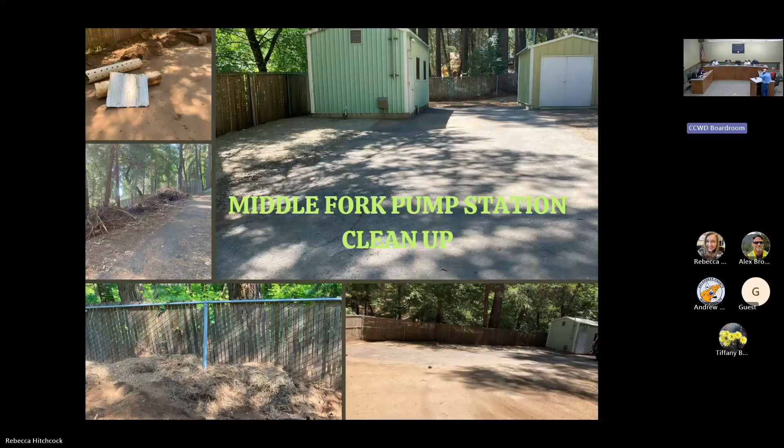So the construction crew, the operator up in West Point, to clean that up. It's bad. They're doing a great job. It's kind of hard to see, but the grade of that driveway to the pump station cleanup is really steep. And so they're doing a great job.

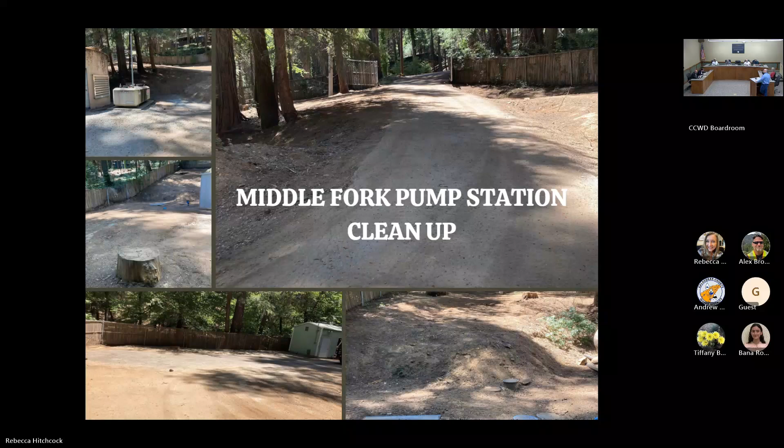So this was a job that was completed. The construction crew worked with the utility crew. It's great. There's 10 folks working on this, and knocked it out in a day. So we talked about in the engineering committee yesterday, fire hydrant O&M. Got some fire chiefs here. Great conversation. So carrying that theme forward.

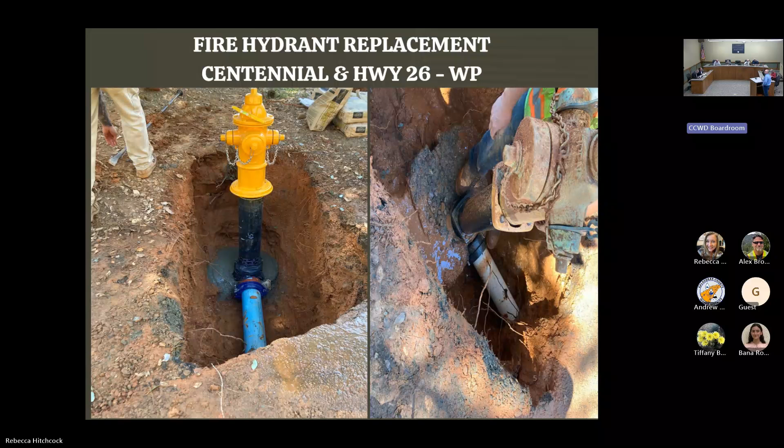We're always out replacing aged fire hydrants. So you kind of see the image on the right. That's the aged failed hydrant that we pulled out of the trench, with the white PVC at the bottom. The image on the left, you can see the hydrant with the magnetized level on it and a kicker for it. And Matt Duncan on our construction crew, working with his team. And we're pretty happy, these are great jobs.

Did he have to keep his foot there till the concrete set? Yes, exactly right. With the level.

Chairman, yes, a quick question. When you did the 300-plus feet of pavement on Wong Court, I know we've discussed this over the years, but are we still coordinating with the county on their paving program in the Rancho? Yeah. The county's involved really from the beginning of the project through soil compaction, paving. County is giving the thumbs up on it. Okay, so we're not working at cross purposes.

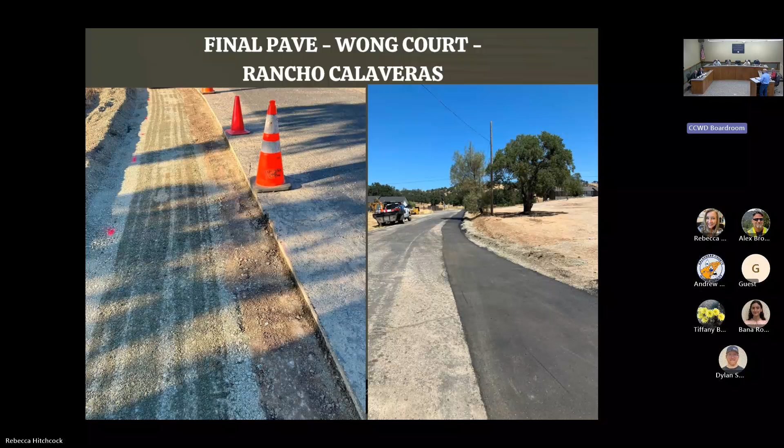Absolutely right. And to carry that a little bit farther forward, annually they give us their work efforts for the year and all the CSAs, and then we work around that. And we'll actually ask them, hey, can you hold up on this area? We have a bunch of work to do. So that when they finally come through, our service lines that need to be replaced are done. Thank you. Yeah, absolutely.

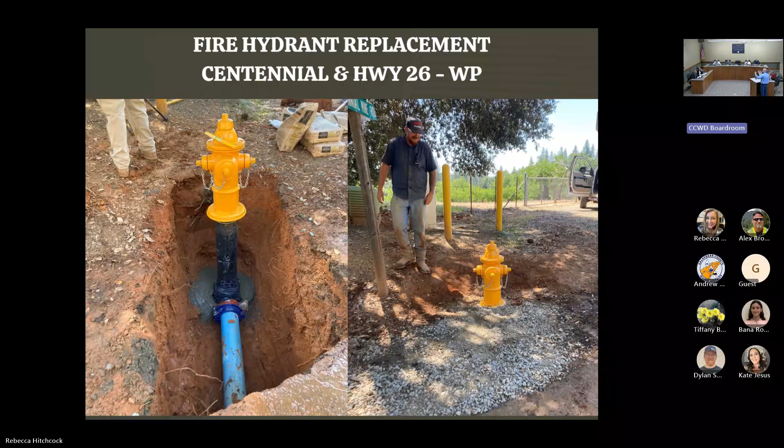I have a question on that hydrant installation. We saw several examples at yesterday's engineering meeting of the isolation valves, but I don't see one here. Was there already one close by? There's already one there. It's just not in the picture. Sometimes what we call the hydrant runner, which is the section of main from the isolation valve to the hydrant, can be 40 feet long. But yeah, this one's not very close.

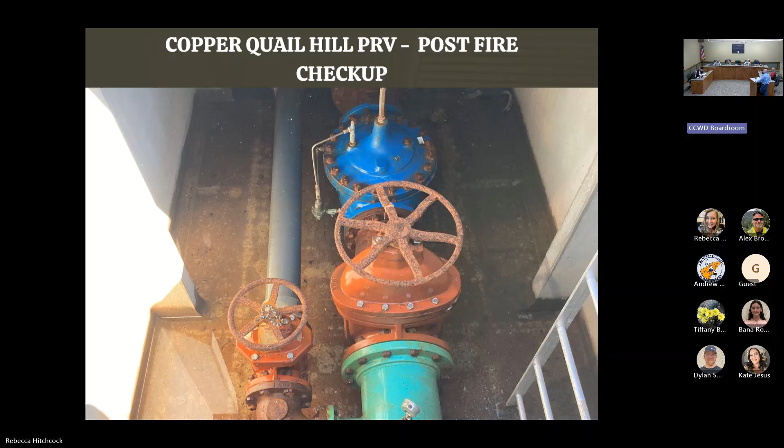And so this is the infrastructure inside of that. It's very large. I believe that's an 8-inch here, 4-inch coming off the side. Beautiful. And then you can see the ladder on the right for access. So this is one of our larger PRV stations, but luckily the grass fire didn't damage the station.

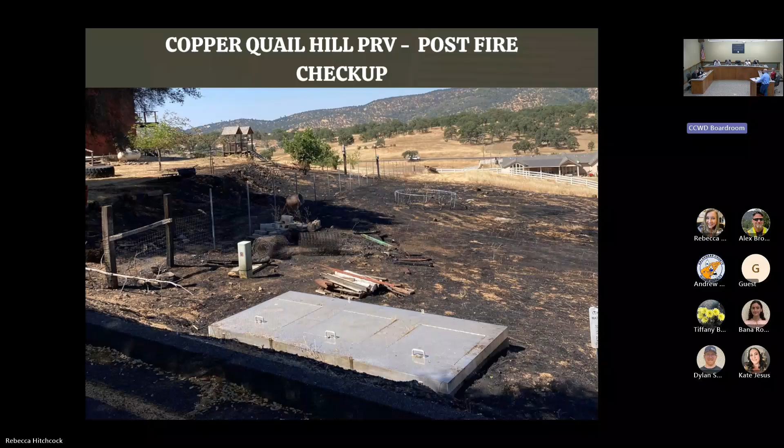What happened is our treatment operators were experimenting with coagulant doses on reclaimed water, trying to optimize the amount of throughput through the filter. That water that they have to push through that filter to the Saddle Creek, Copper Valley Golf Course is initially full of algae. It's really turbid. So one would think that the more coagulant you add, the greater the throughput of the filter, the cleaner they can get the water.

The operators through their tests actually realized that they were overdosing coagulant, so they reduced the amount of coagulant. And you can see the flow rate, the image on the top, increase. So they're able to increase the throughput of the filter by reducing the amount of coagulant, which in effect increases our ability to lower our storage pond, give more water to the golf course, and actually save money.

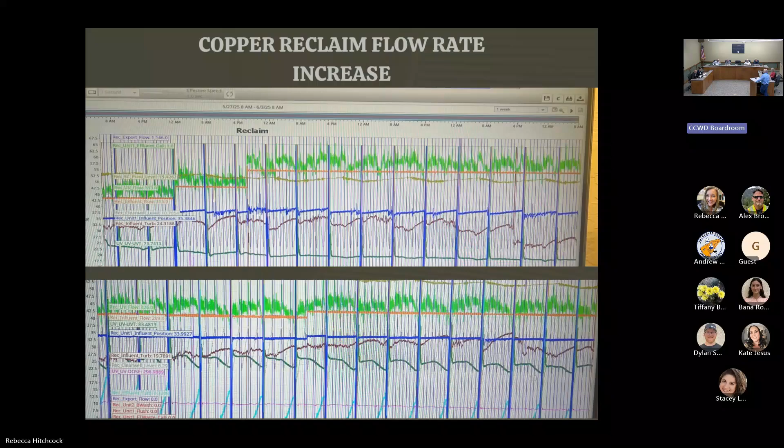So our treatment operator goes in the morning, picks up all of the heaters, the fuel tanks, anything they might need from the fire camp, and he deposits them. So there's a lot of coordination that goes on between Ron Rose, who's a senior wastewater treatment operator, and CAL FIRE.

You have to excuse my ignorance, but why can't CAL FIRE carry their own gear? I believe that's just the only thing they can't carry over. Gas powered tools. Weapons of mass destruction, essentially, they can be used potentially. Thank you.

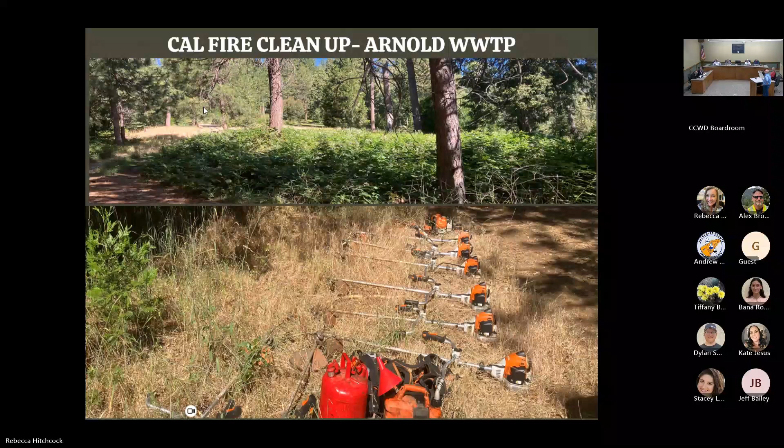And then the light turns on, and it annoys the heck out of the neighbors. So then we find ourselves going, who left the light switch on? The office is getting calls from the neighbors, and they're not pleased because these lights are like spotlights lighting up this whole lift station. So to foolproof the whole issue, our electricians go out and adjust the lights themselves to reduce the glare toward the neighbors. So one of these interesting ones that can keep popping up and causing issues.

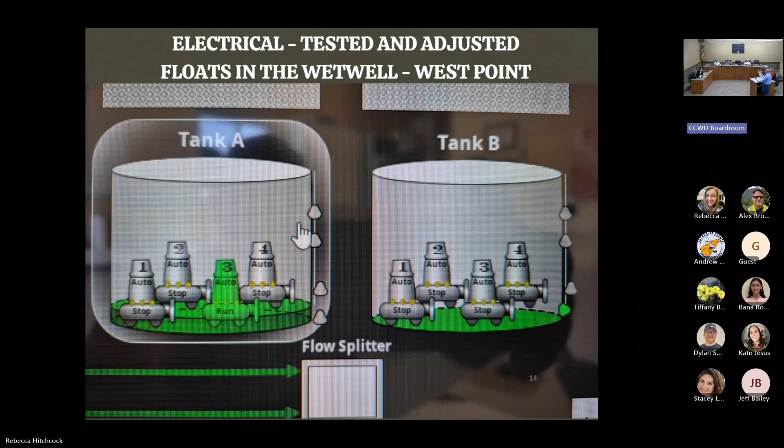And then at West Point, we have recirculating gravel filters. They take the septic tank effluent, spray it into this gravel filter, and it goes down to the bottom.

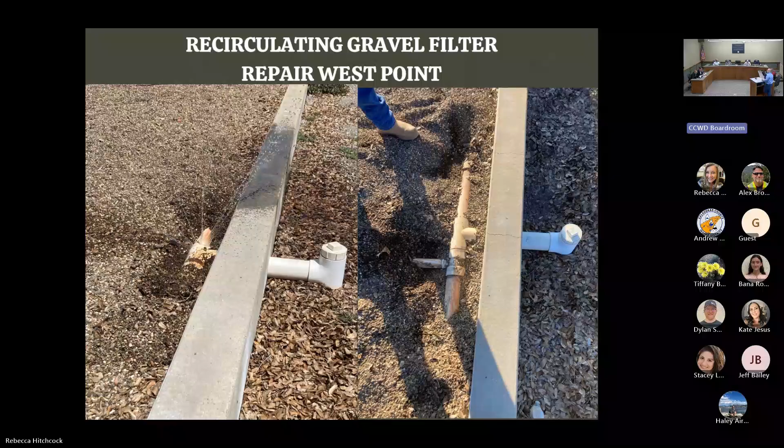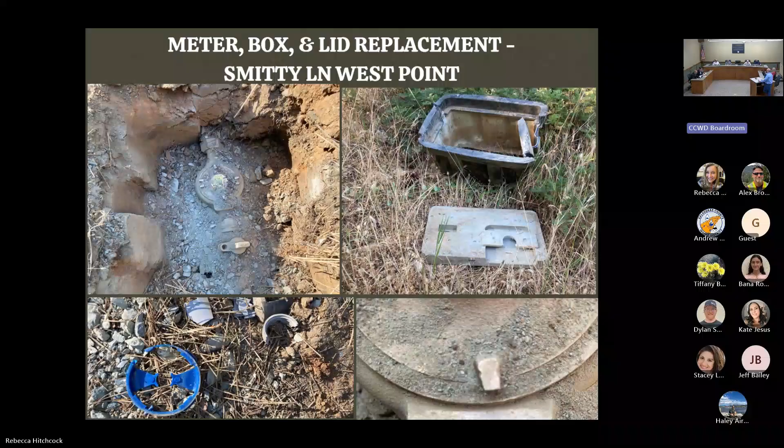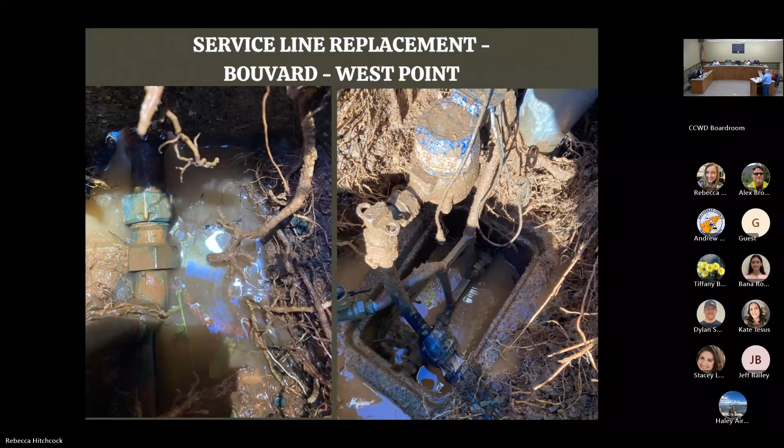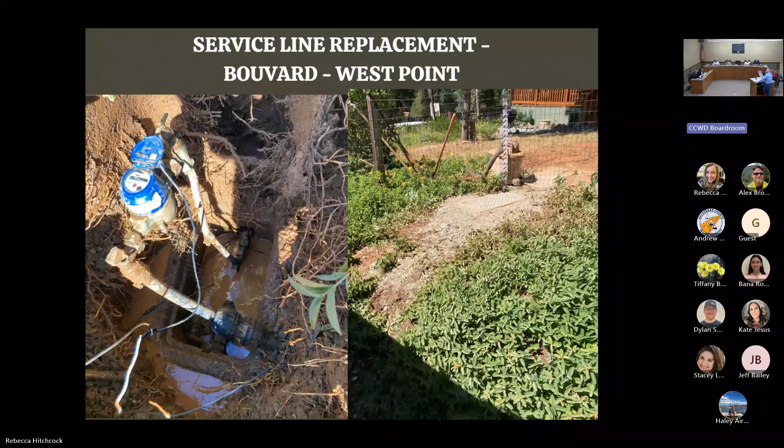And then here's an example of the riser. It's kind of hard to see. The image on the right, you see the meter kind of up at the top of the image, and then what's called a riser, bottom meter. So this is when you have a service line that's really deep. Stack meter box on top of meter box and install a riser. It's a set of pipes that actually bring the meter up so that you can work. A leak happened down below in that second box. So our guys can say great things about the work that they're able to do. The image on the right just kind of shows you the after. The meter's coming down after the trace.

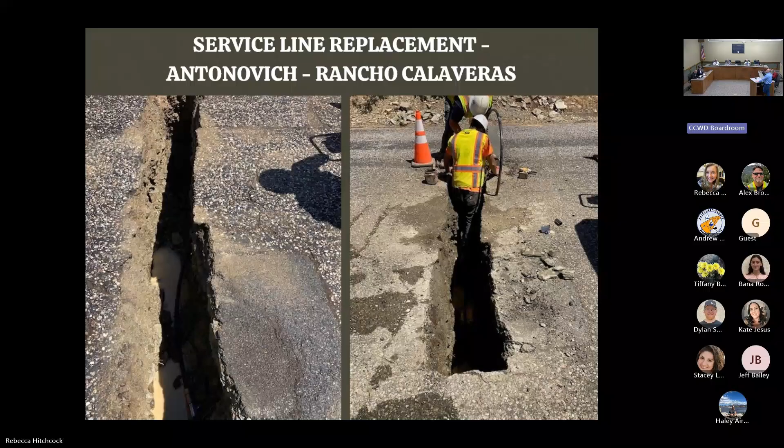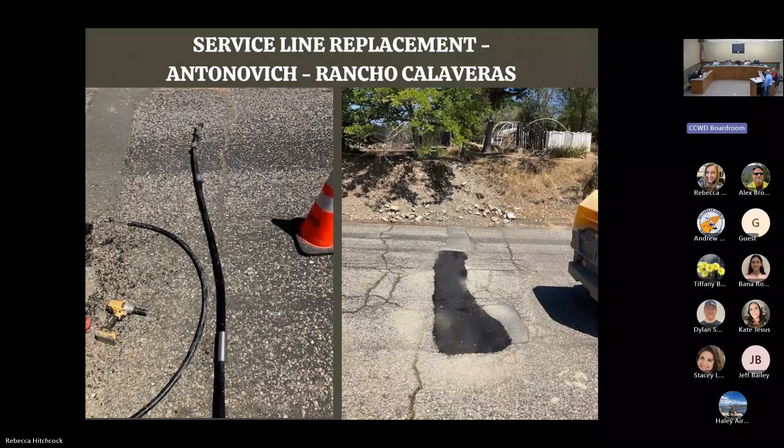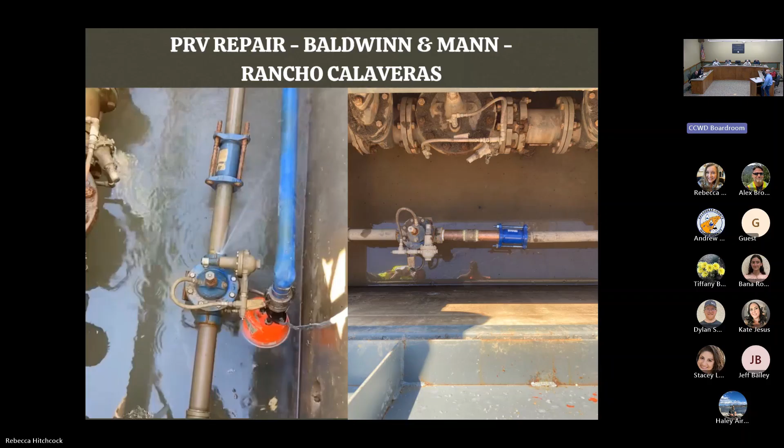Rancho Calaveras again. So this is a connection at a pressure reducing station on Baldwinn and Mann. This is a PRV, what we call them, reducing pressure from one zone into another. And over time, the components are going to break, so we have to shut that system down.

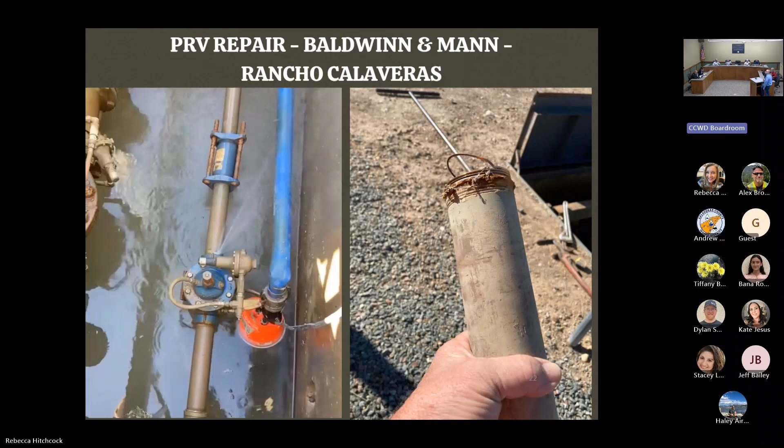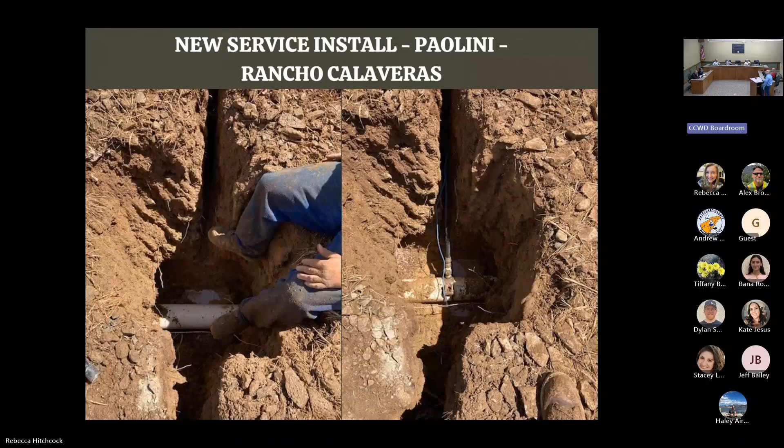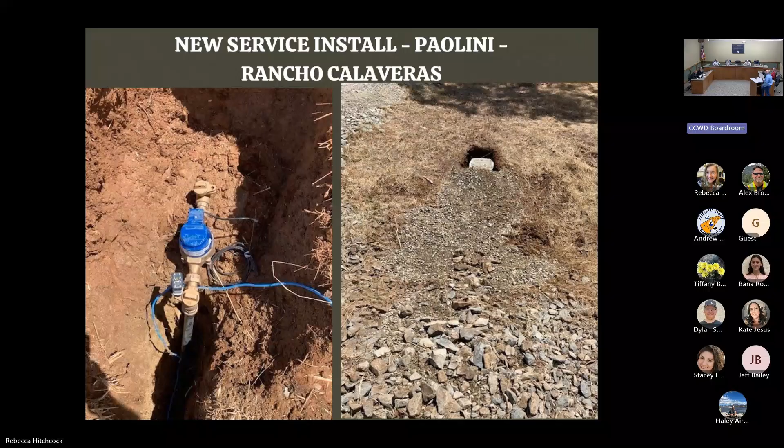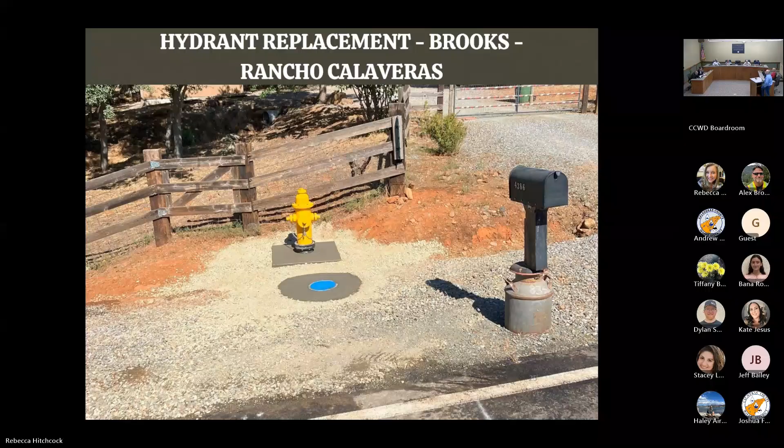Just to expand on that briefly, sorry, Damien, but that's done under the mutual assistance agreement that we have with TUD. Under that previously approved agreement, it's a reimbursement mechanism. Works well. I think last time you were here, you reported on one that we did for Utica in their parking lot, under the same agreement. Is the labor rate already agreed to in that? Yep. The one we worked out with TUD, we spent a fair amount of time pushing it on TUD in advance, and then we used that template for the agreements with Utica and other agencies. The way we did it, we don't put in the dollar numbers, we just tied it to those employees' current rate. So we're able to provide that assistance if we find the staff available. We create a job tracking number, and all of that work is tracked in that job number.

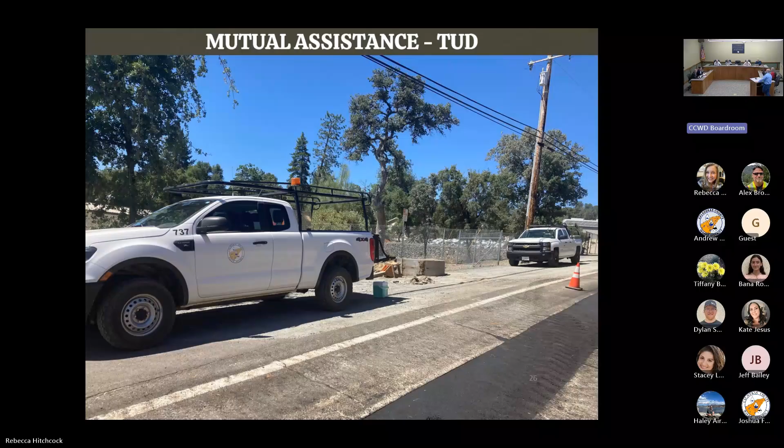So a couple of things that we cover here, some of you referenced. It's really helpful because it's helpful to see how 20 counties, regional players for wildfire protection and mitigation communicate. This exists in folks from all the different ones that get together and have this conversation. It's also a real help to learn from.

And I think one of the things that I took away from this is that public outreach perhaps is going to be the best network that we can have, to share with our customers about how to respond to it, so that they don't negatively impact the water supply. That is really important. It's great to see them trying to focus.

How many times that day did we hear the words cooperation, or partnership, collaboration? Yeah. That's amazing. And Calaveras County is working on the community wildfire protection plan as we speak, and we're starting to see all of the folks involved.